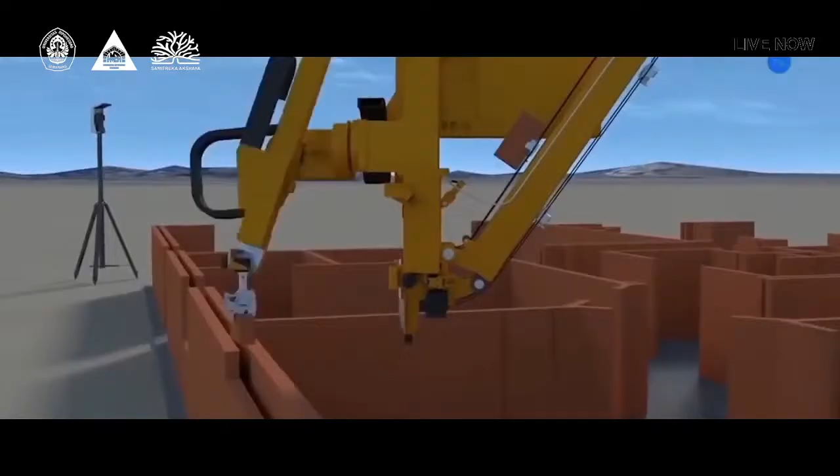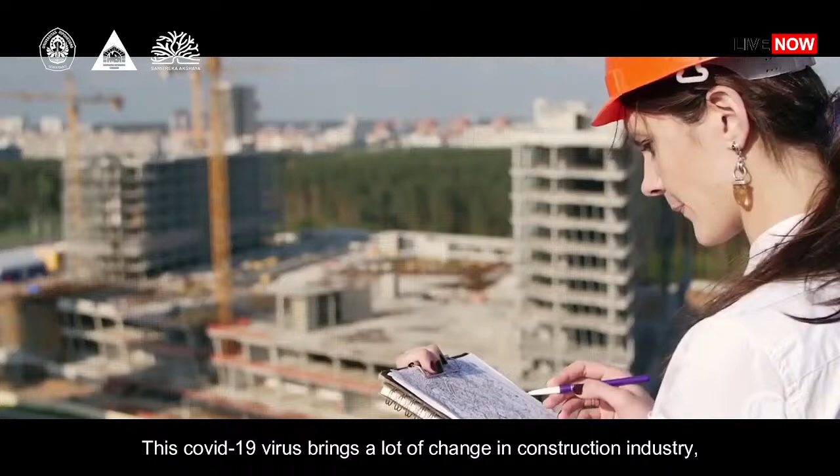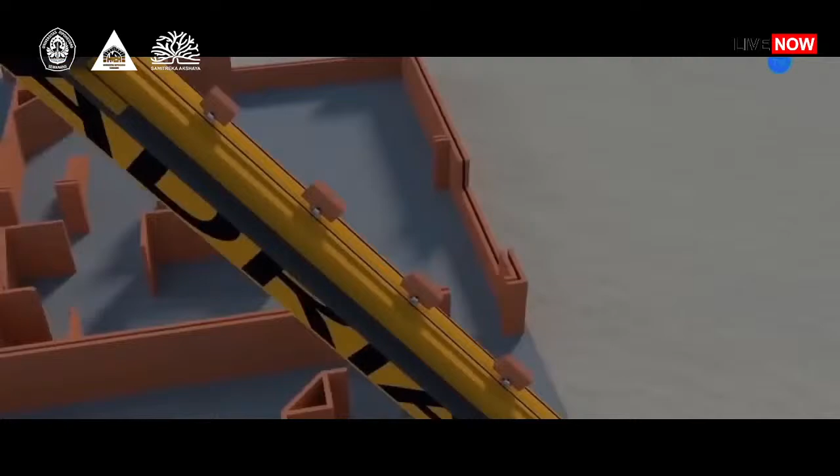During the pandemic that hit the entire world, including Indonesia, this resulted in almost all human activities being paralyzed due to the physical distancing program launched by the government in order to reduce the spread of COVID-19, which was increasing day by day.

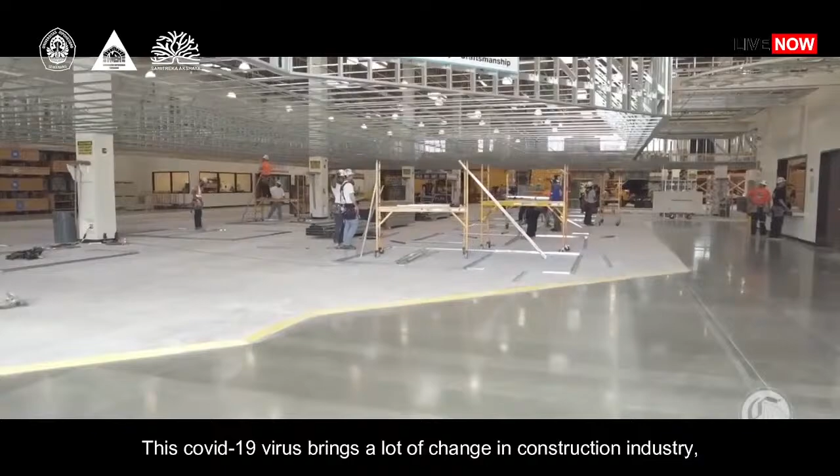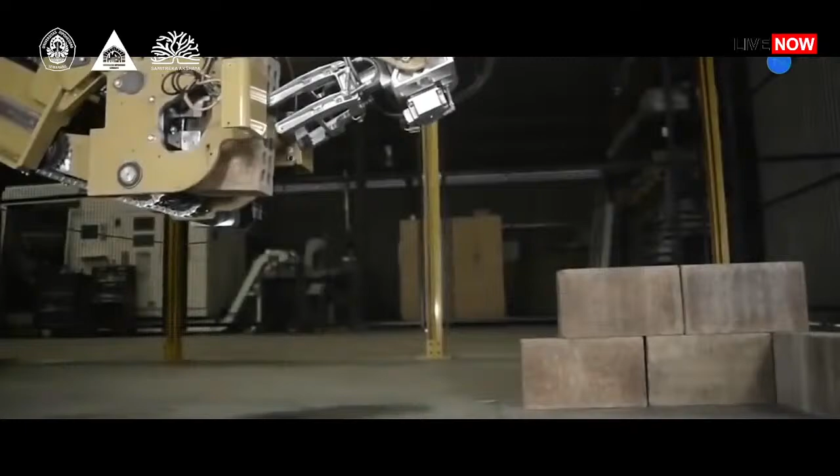COVID-19 virus brings a lot of change in the construction industry, which has a big role in the pandemic and post-pandemic era. The construction industry must have innovation for its buildings, such as adapting to new technology, which also helps our country to be more advanced.

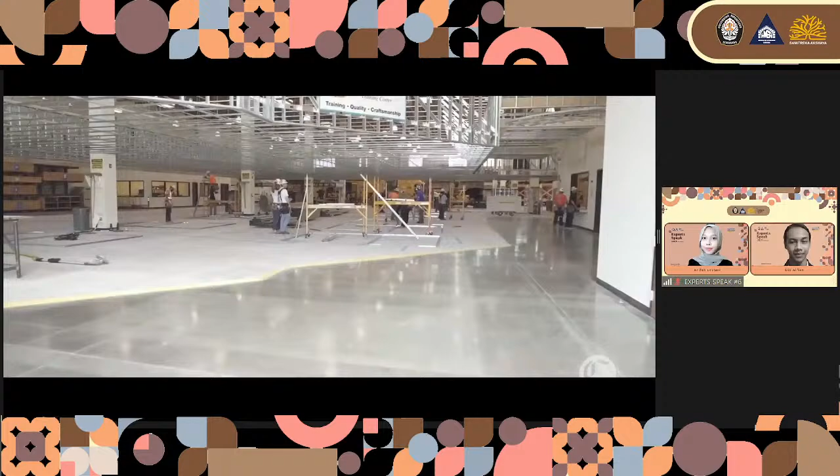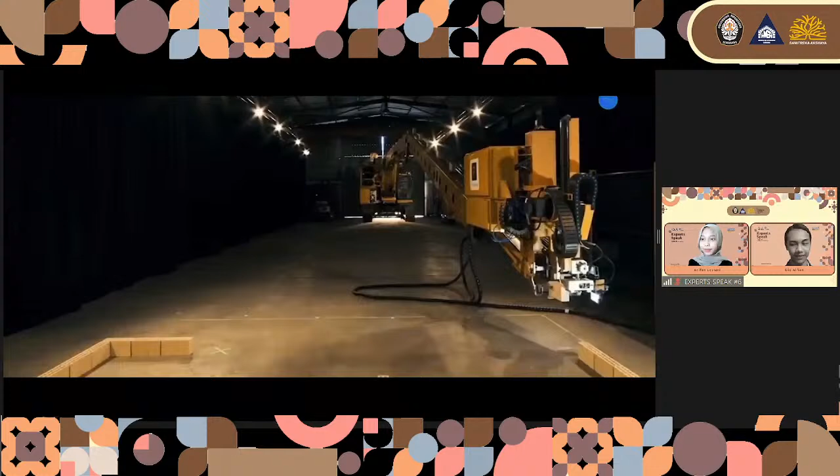This COVID-19 virus brings a lot of change in the construction industry, which has a big role in the pandemic and post-pandemic era. The construction industry must have innovation for its buildings, such as adapting to new technology, which also helps our country to be more advanced.

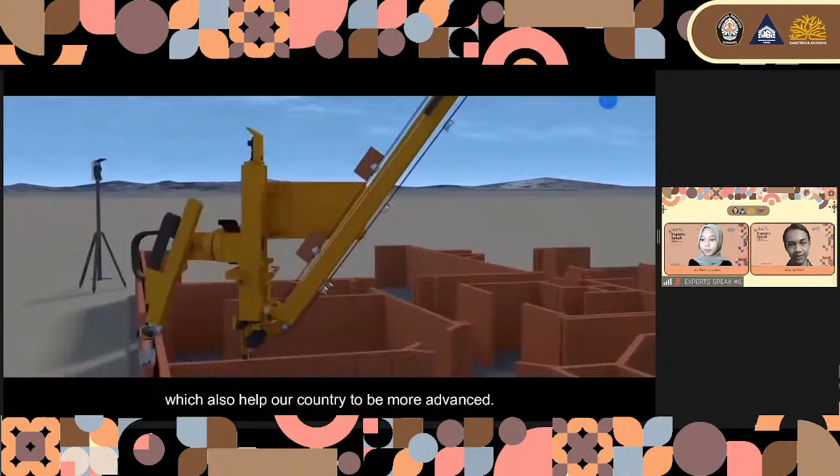And moving right along, we have the main agenda of this afternoon: the material about innovation in construction method during the pandemic era from our special guest and speaker, Mr. Iswandaru Widyatmoko, PhD, MSc, hosted by our lecturer, Mrs. Farzanela Swarto, ST. And before we move to the main agenda, let me read out our moderator's CV first.

Mrs. Farzanela Swarto, ST, MSc, was born in Sleman, 21st March 1989. She worked as a lecturer in University of Diponegoro and PhD student in University of Nottingham. She graduated in Civil Engineering from Diponegoro University in Indonesia in 2012, having a thesis about probability analysis of Patas AC bus with multinomial method in Semarang-Solo Toll Road. She also graduated in Road Management and Engineering from University of Birmingham, UK in 2013, having a dissertation about experimental investigation of the effect of PFA on cracking expansive soil on unsealed road.

She has training and certifications such as Road Engineer from Lembaga Pengembangan Jasa Konstruksi 2019, Bimtek of Infrastructure Work Scheduling MS Project, Ditjen Bina Marga 2015, and a lot more. She has publications such as Toll Road Maintenance Toward Minimum Service Standard in IOP Conference Series, Earth and Environmental Science in 2021, and a lot more.

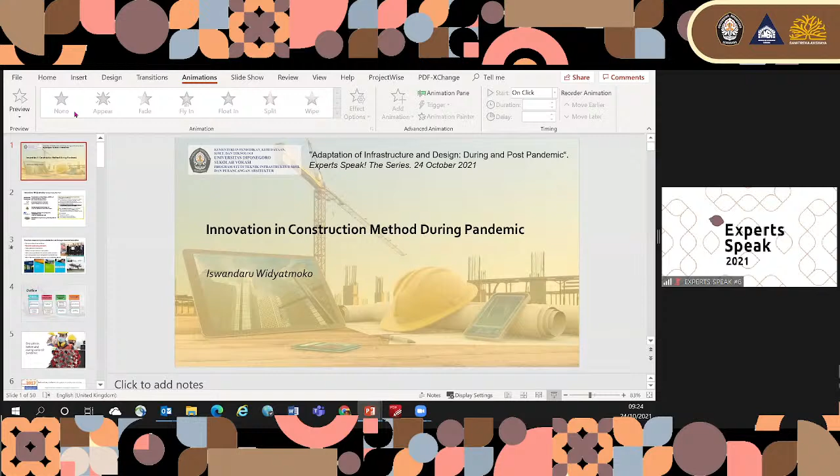Good morning. Can I have feedback on whether you have seen the big screen of my slides? Yes, already. Yes, Pak, sudah.

Thank you. So today I'm going to share with you a little bit about some innovation in construction methods, which happened prior to the pandemic and being promoted throughout the pandemic era.

Well, I'm not going to introduce myself, Mrs. Nila has already introduced me, so I'll just skip this section about me.

The next one is about what I do. With AECOM, I lead research teams. Mainly, we are researching into improving the whole life cost and whole life benefits, and the way to design our assets so that it can improve sustainability and improve longevity of the assets. There are several subject areas which we have worked on, and for today we are going to focus on the developments in automation in pavement construction.

So what I'm going to do today: we'll go through a little bit on the situation, the disruption that happened in the world and in the construction world before the pandemic. And then what happened during the pandemic? Has anything been done on that matter in relation to addressing the issue with the pandemic and the utilization of this technology?

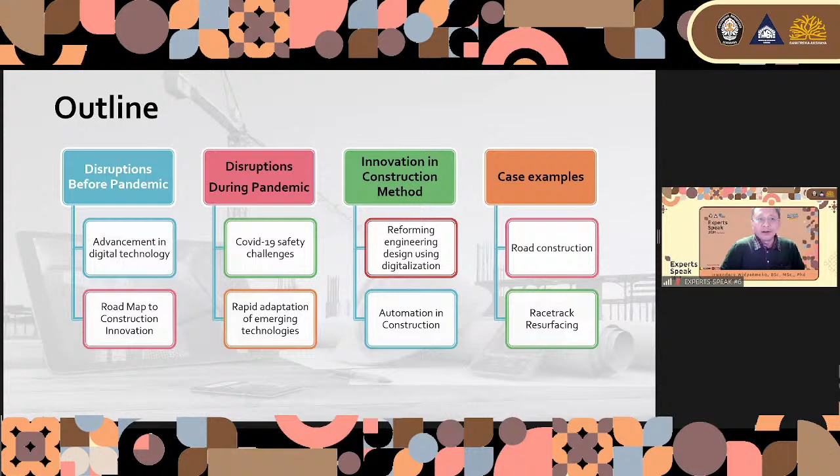And then I will elaborate further about innovation in construction methods, and at the end I will provide you with two case examples. So hopefully that will clarify the elaboration on some of the innovation methods in construction.

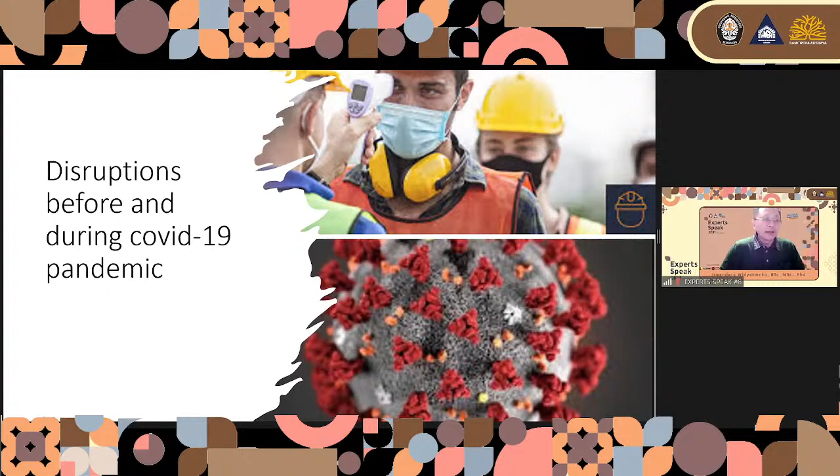So let's start with the disruptions that we have seen before the pandemic. Before 2017, we have been hearing the news or the reports about the Industrial Revolution 4.0, whereby in this revolution, the industry had already adopted a lot of technology, mainly digital technology, and improving the connectivities in the application of these technologies. What happened in the construction world?

In the construction world, they also started adopting these technologies that had been developed during the Industry Revolution 4.0. So digitization started being used in construction, and a lot of work has been done remotely - for example, the use of drones, Internet of Things, and increased connectivity using central data in servers, cloud computing, and so on.

And there are three main items during this disruption in 2017. One is digitization - we'll talk a little bit about digitization later on. And then the second one is industrialization.

One example of industrialization is the construction industry using modular, prefabricated construction methods more and more. The next trend is globalization, whereby people started collaborating and competing globally, increasing competition in the markets due to global connectivity, including within the construction industry.

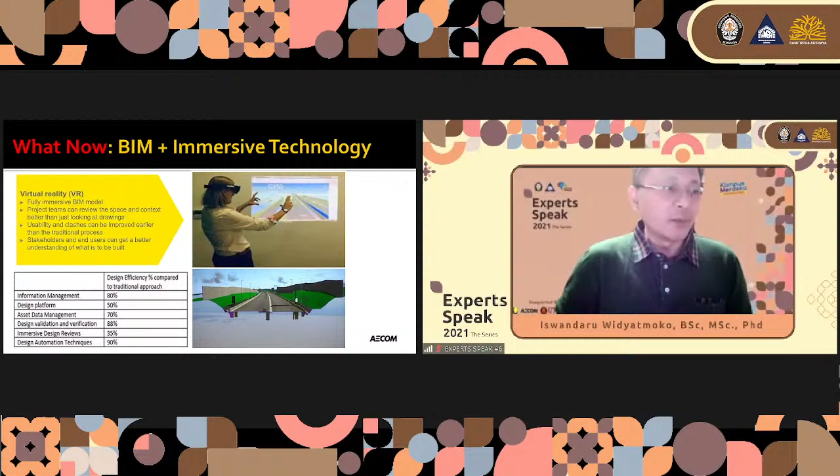This is what has been developed by AECOM before the pandemic - virtual consultation, where you have a virtual exhibition room for a project, and then you present the technical details of the project, any challenges, and any channel for engagement. It's live engagement between parties - between the public around that project and the authority who will approve the project.

Because the way of communicating is visual, it's a lot easier for everyone to understand what the project is about. For example, you have a road crossing near your properties, and you can visualize it, and then make a decision - oh no, I don't like it, or yes, I would like it.

This good tool was introduced before the pandemic, and since the pandemic there's been a restriction on public gathering, this kind of tool has gained popularity. So a lot of people now know it's become a norm - the virtual consultation room, exhibition in virtual mode, has become a norm nowadays. So that's another technology that has developed quite rapidly.

The next one is, with immersive technology, we can visualize what our project is going to look like. This is a project currently being done by AECOM, which is an improvement of an underground tunnel under the site at the historic Stonehenge site in England.

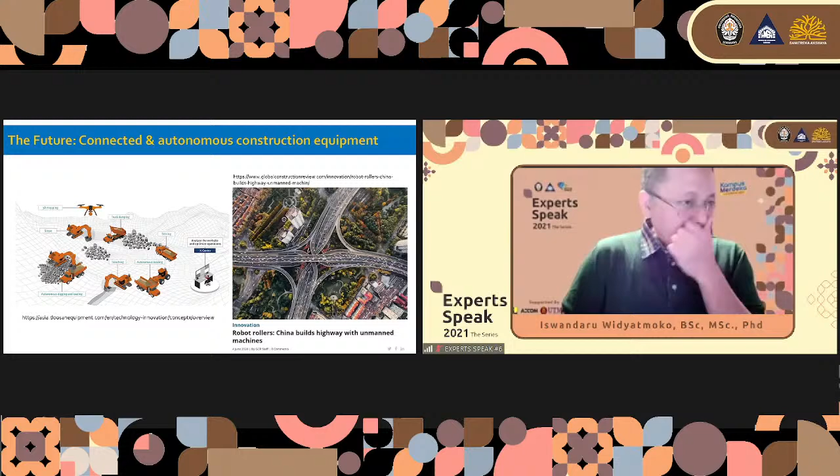So what next? Last year, in China, they started the process. They already started working towards autonomous construction plants, and in fact they already started doing that in several of their projects.

So whilst we thought what National Highways in the UK was doing was quite ambitious, many of these processes are already started in Asia, in China, and two years ago I was invited to South Korea, and they started working on that in South Korea as well. So a lot of things have been going on, trying to improve and modernize construction equipment.

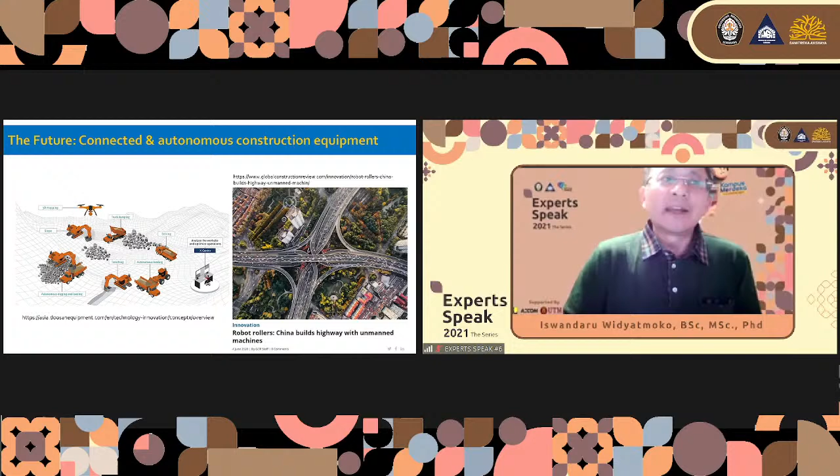Of course there would be challenges in the future with respect to autonomous construction plants, i.e. what would be the risk of unemployment to skilled workers, or what would be the legal aspect of having equipment which is not controlled by humans. There are things that still need to be done. Let's see some examples.

Example number one: I will elaborate further on the works we did in developing and reviewing the process of automation in construction, how this can be implemented in projects. We looked at the process, how digital data can be captured, collected and kept on the server in real time.

When the materials are delivered on site, all the data will also be transmitted in real time to the server. The same when the work has been done and tested, after installation and in situ testing, all the data would be collected and kept on the server for interrogation and monitoring in the future. And then how the data will be presented as a BIM layer, building information modeling layer. I'll talk through this process in the next few slides.

So let's start from the mixing plant. With a lot of sensors attached to the mixing plant and to the lorry that will receive the asphalt materials produced at that mixing plant, we will get information on vehicle registration, trip number, routes, material types, loads, and all the timestamps.

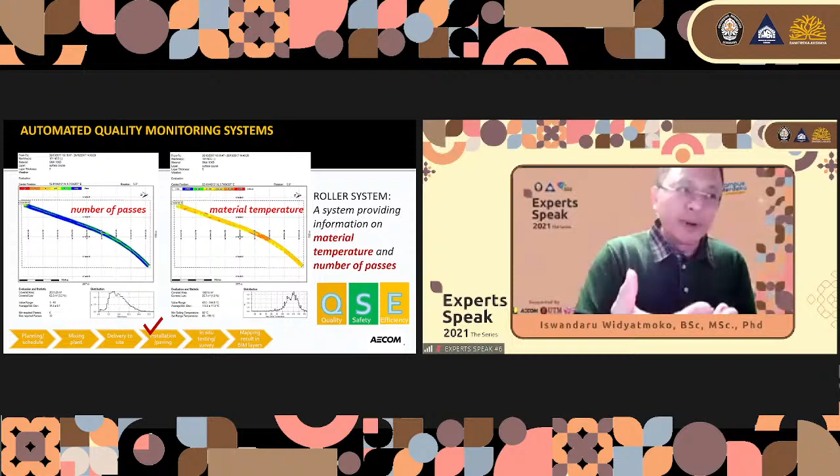So if you look at the temperature here, the red and orange are good temperatures for compaction, but when it comes to green or blue, the temperature is too low, which means problematic. Why is it problematic? I'll show you in a minute.

This is the situation whereby if you have a variable temperature on your material, you can see some materials are hotter than others. The blue ones are the cold spots. If you look at the cold spot, after a few months you will start getting material loss because the material was not compacted properly. The same thing if your temperature on the mat is variable - hot, cold, hot, cold - then you will end up with surfacing that is not smooth, it will be variable up and down. So that is the importance of controlling the temperature, and these sensors help.

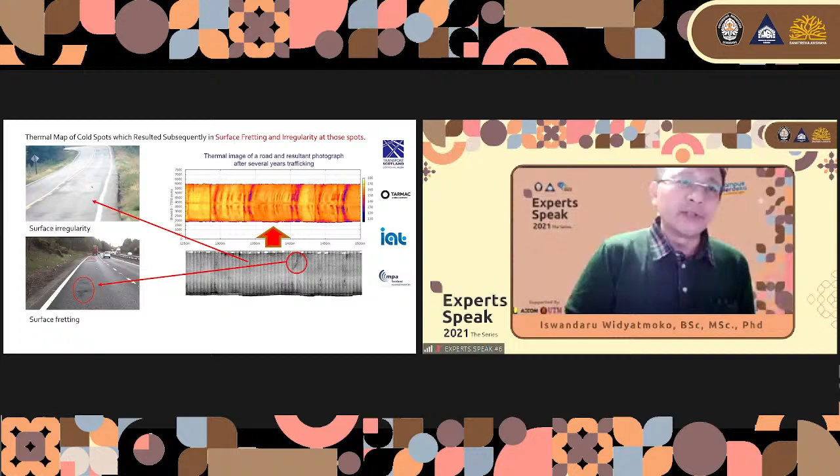The next one is those data - because they are digital, they're quite easily accessible. So at the end of the work, all the data can be presented quite nicely, and they can be incorporated into any pavement management system. With the click of a button, you will have all the information about the material for that particular chainage, for that particular location. And also with the click of a button, you can see exactly how many passes, or whether the material was installed at the right temperature or not, for that particular location. They are all very detailed and tied in with the location, because you've got a GPS location with the data. That helps in the future during the service life - if anything happens on that particular section, we can revisit the data and try to understand why there is a problem there.